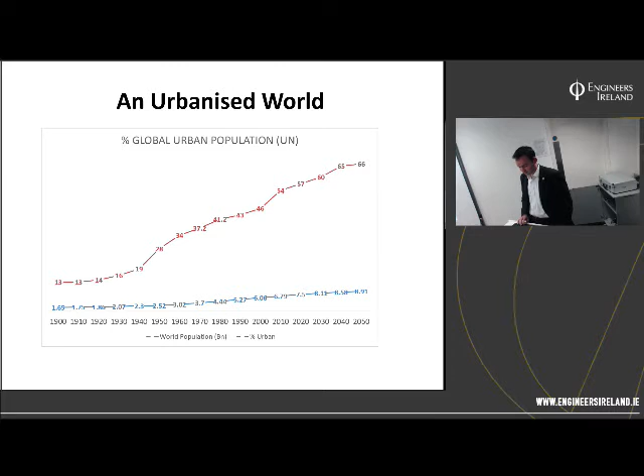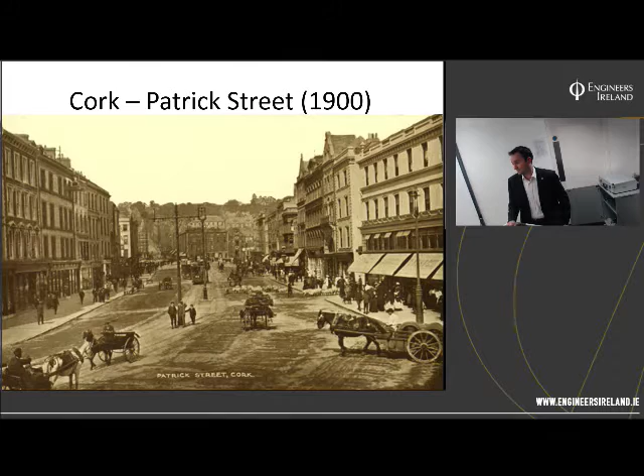Here's Patrick Street in Cork in 1900, and as you can see, it paints a very easygoing city streetscape. You've got lots of horses and carriages, you've got sheep crossing the road as well. It was a city for all sorts of livestock, and it was just very slow moving, with a complete absence of traffic lights and so on.

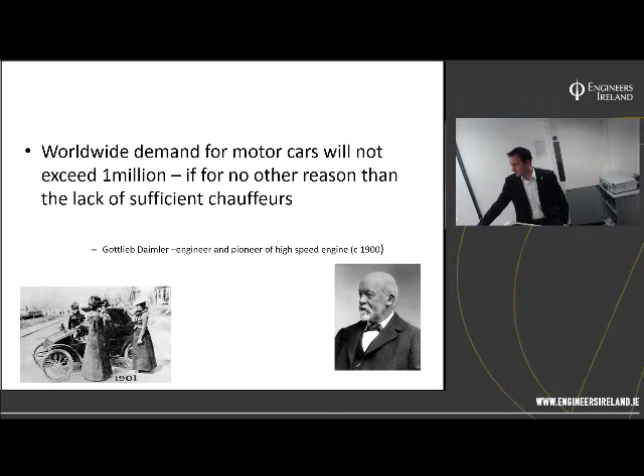Here's an early prototype of a General Motors car, I believe, in 1900. It was seen as the coming thing, but not everyone was convinced, of course. This was a statement by Gottlieb Daimler, engineer and pioneer of the high-speed petrol engine. Despite what some people said, by 1910, almost all London bus services were petrol engine rather than horse.

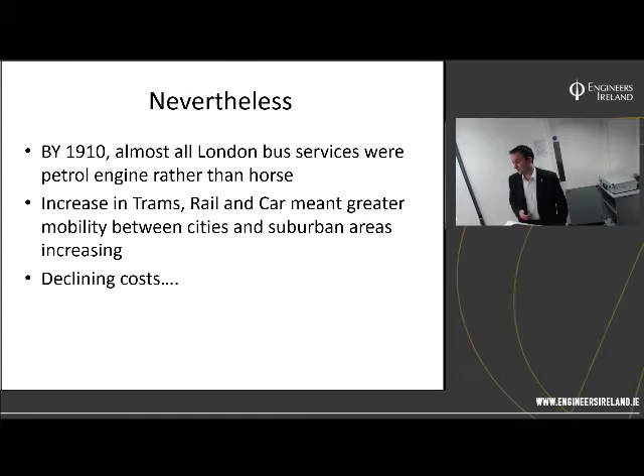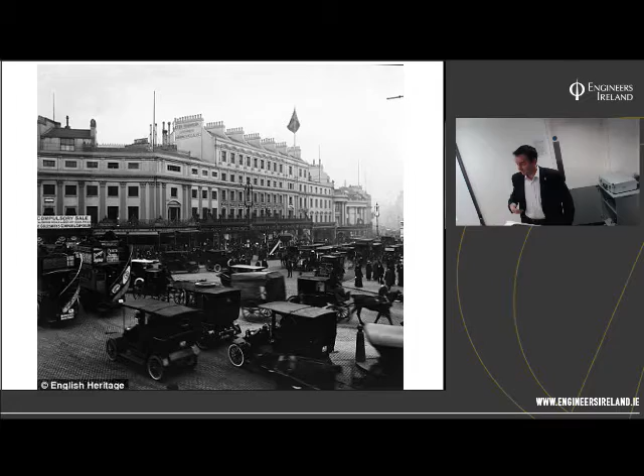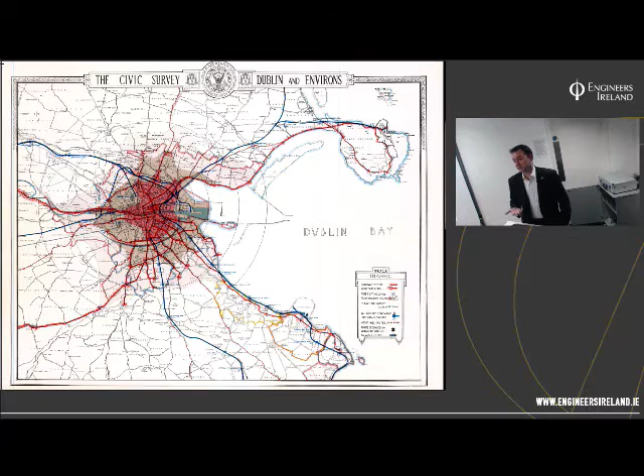Jumping across the water to Dublin, this is the extent of the tram system in 1916-17, I believe. You can see all the red lines extending out of the city. Quite ironically, this was seen as the golden age of rail in Ireland and the tram in cities. And like most golden ages, it usually signals a peak and a subsequent decline, because by the mid-1920s, the first Dublin bus was introduced.

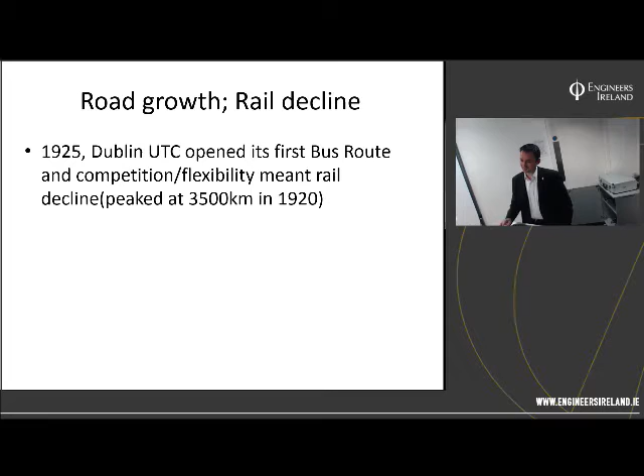Rail was peaking at 3,500 kilometres, but was going to reduce. It's quite interesting, the anecdotes at the time. You had talk of buses having greater flexibility than trams in Dublin. For example, there were stories of buses cutting in front of trams to pick up the next customers at the next stop. So it was a very highly competitive market.

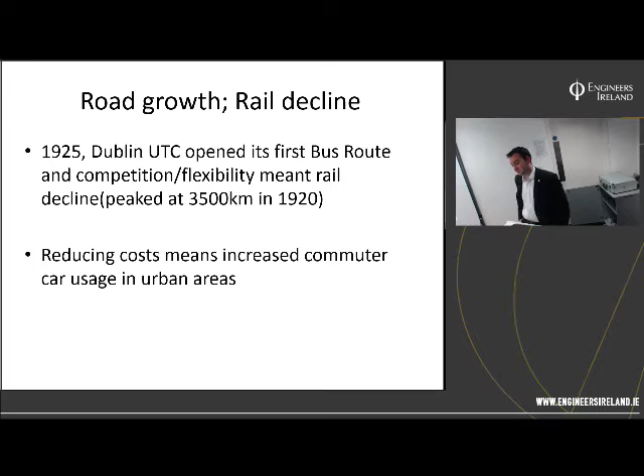And increasing car usage in urban areas. I think in Britain by the end of the 1920s, we had almost 100 registered car companies in production. So the times had very much changed. And then this is the typical London driving licences as well - you've gone from about 100,000 in 1920, up to 250,000 by 1930, and then just before the war, we were approaching 350,000.

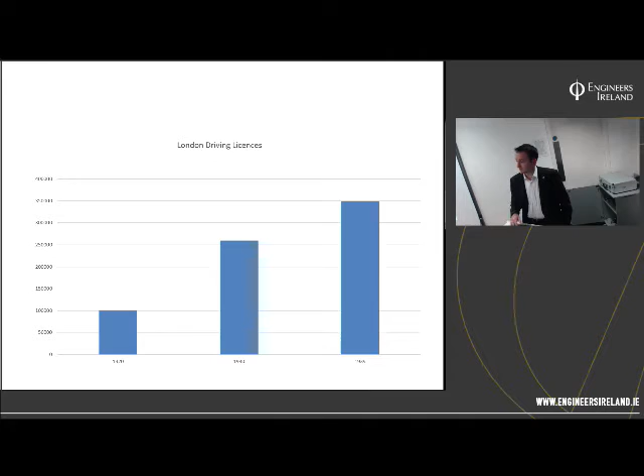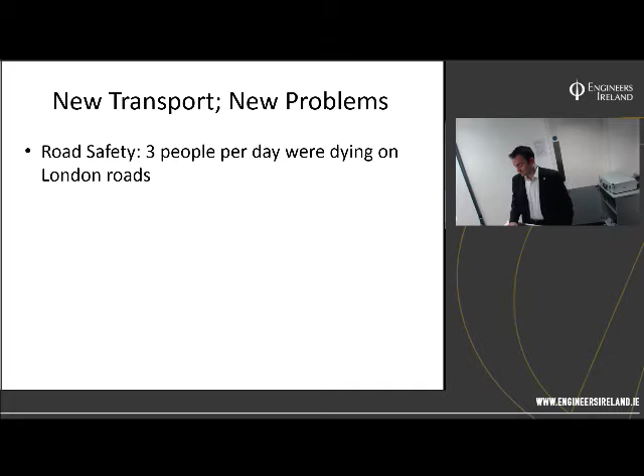So again, increased car usage in central London, and road safety was what came out of this, where at some stage we had about 3 people per day getting killed on London roads. Again, you had capacity stories - I think we had 51,000 vehicles, 3,300 horse-drawn carriages at Hyde Park Corner in 1921.

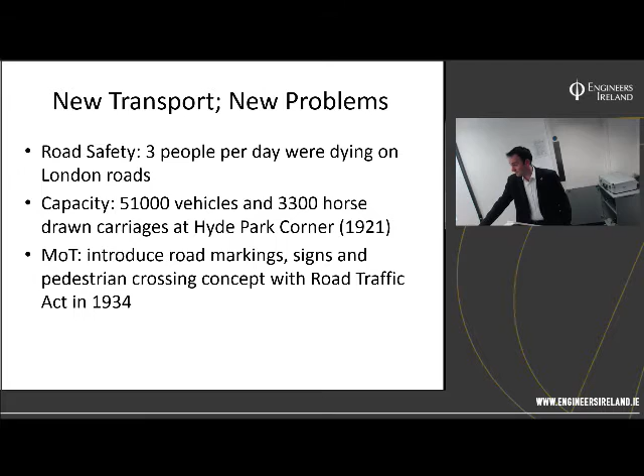And of course, legislation took time to catch up with this, so we had the Ministry of Transport having to introduce road marking signs, a new concept called pedestrian crossing, which was in the Road Traffic Act 1934. And of course, we had the first traffic signals.

So the first traffic signal was introduced in 1926 at Piccadilly Circus. The first one they had a go at was in 1868 - it was a gas-powered traffic signal. It exploded after one month, killing the person operating it. So they had to wait another 40, 60 years before electricity was more reliable.

They had the first signal installed in Dublin in 1937. And at this stage, we now have 4,000 to 6,000 traffic signal junctions in London, depending on how you count them. So it was the scale of things.

And post-war, we kind of entered the planning stage, where this is the famous Ringway scheme in London, where the plan was to build 3 or 4 concentric motorways around central London, just where the talk was purely about capacity, trying to keep things moving as much as possible.

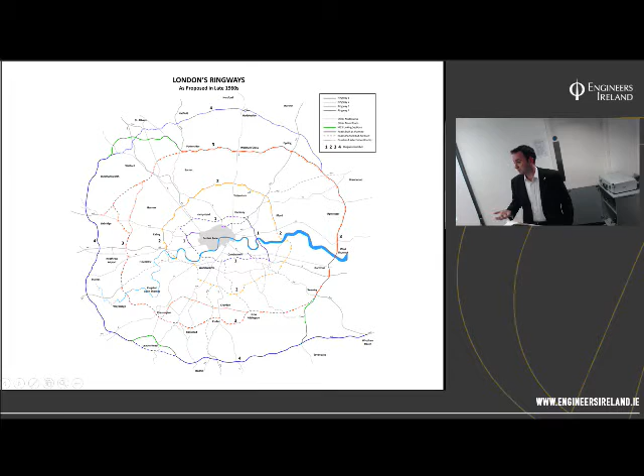So you have the North Circular Road in the north, which is probably the only remains of that. But you also had the Blackwall Tunnel, the second bore, opening in 1967. And you can see the remnants of the M25.

On the other side in Cork, you have this grade separation running through the heart of the city. Now, to anyone who doesn't know what Cork looks like, I think the rail station is just to the right of the picture, but it essentially demolished a major city block in the city centre to have multiple slip lanes.

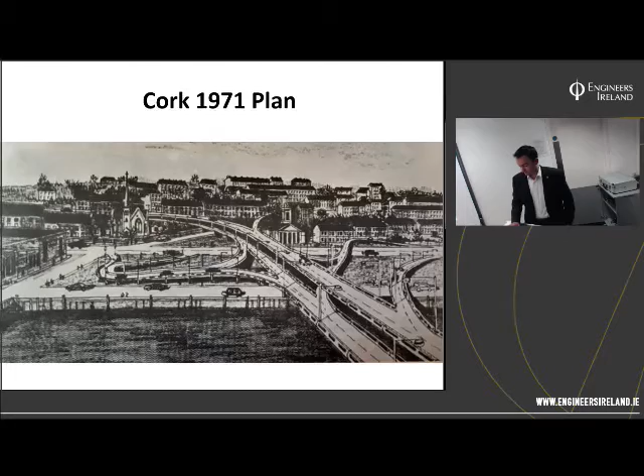And it's worth reading about a guy called Robert Moses in New York, because that was a man who absolutely loved capacity, and at the time he was advocating lots of slip lanes and this kind of grade separation in New York. And just for comparison, this is what this road looks like now - it's just a simple 3-lane carriageway, non-grade separation.

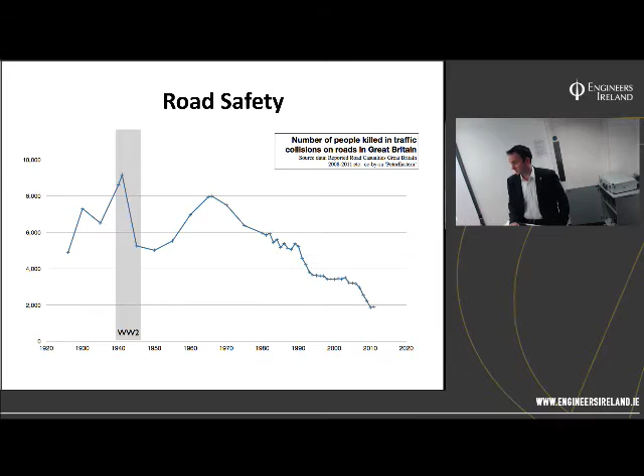Sometimes the traffic growth at the time in the early 70s was assumed to continuously be going up, and it wasn't quite the case. By the early 1970s, we had probably the peak in road safety - we had about 8,000 people getting killed on the roads in the UK in the late 60s. In Ireland, this is a typical trend as well, up to 1972. So something had to be done in terms of road safety.

So we had seat belts becoming more mandatory, particularly in the early 80s.

We had advertising campaigns between 1970 and 1986, about 7 or 8 individual national advertising campaigns. Pedestrian crossings were introduced, as well as speed limits. Around this time, 70-mile-an-hour limits on motorways and 20-30-mile-an-hour schemes were planned in cities in the UK and Ireland. Drink driving was absolutely rife as well.

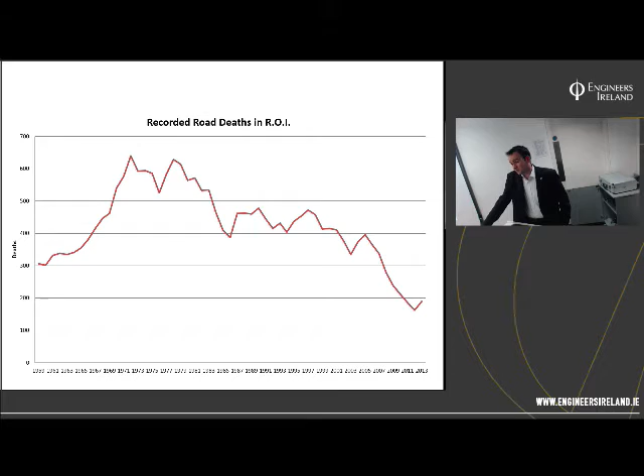Consequently, we had the concept of engineering, enforcement and education introduced - essentially the police or the Gardaí in Ireland working with road safety engineers, and the education of the general population on good road safety practices. From 1970 onwards, this resulted in a continuous decline in road deaths. Now Ireland is ranked 6th in the road safety index in the EU, and the UK is usually 1st or 2nd. It's something we've done well in terms of city and rural road safety schemes, and something we should be quite proud of.

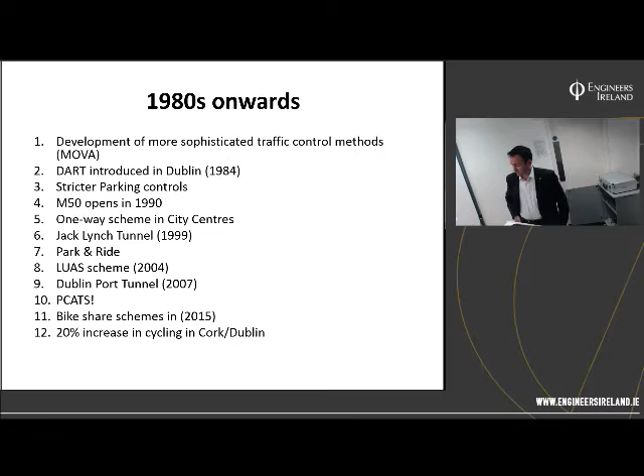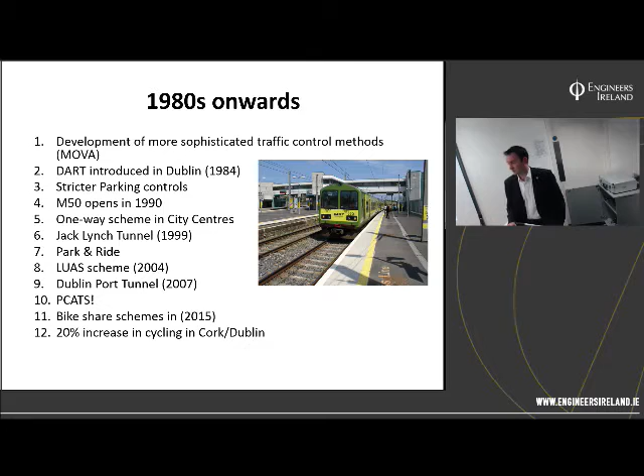Then we get into the 1980s, where we developed more sophisticated traffic signals such as MOVA. We had the DART introduced in Dublin. It was around the 80s when we started trying to move away from cars and focus more on modal shift, with stricter parking controls. We had the M50 ring road around Dublin, so if you wanted to travel from, say, Ballymun in the north down to Dún Laoghaire in the south, you could just use the M50 rather than go through the city centre.

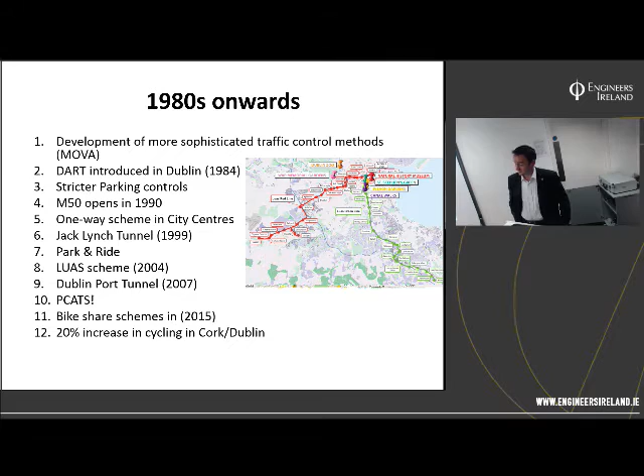Correspondingly in Cork, we had the Jack Lynch Tunnel on the east side of the city, so if you want to go to Dublin, you don't have to go through the city centre - creating a nicer urban environment. Then we have the Luas light rail scheme, before all the strikes, which has been quite transformative in shifting modal share from cars to people using light rail.

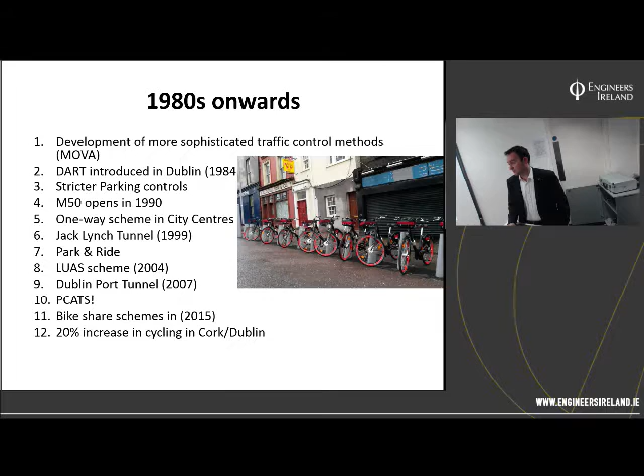And then in Cork, Galway and Limerick, we've had bike share schemes introduced, and other things like PCaTS, or pedestrian countdowns at traffic signals, have been quite a success. In the last 10 years, we've had about a 20% increase in cycling in Cork and Dublin. So it's quite a far cry from what you saw on Patrick Street in 1900.

And then we've had Crossrail, scheduled to come in 2018, which allows you to get across London in about 20 minutes - which would be excellent. So that concludes my section.

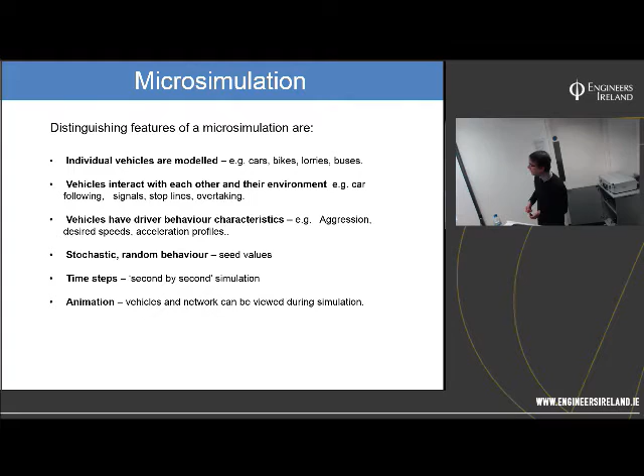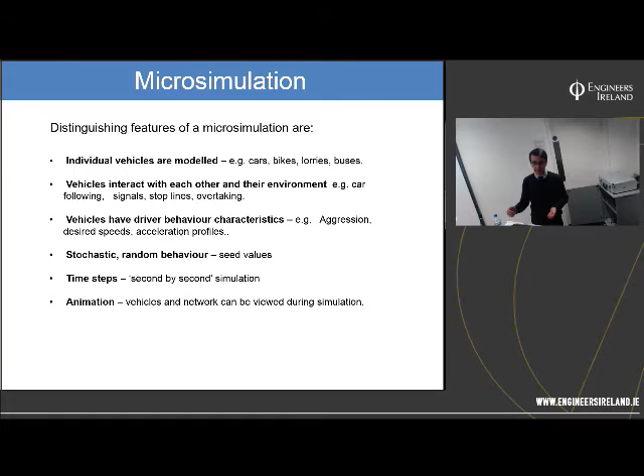And finally, we've got an animation. We can present these models in 3 dimensions, nice graphics, video presentation - great for stakeholder engagement, getting the message across, talking to non-engineers, engaging with the public, letting them see what we're proposing. We can do all this in 3D animated videos, something we can't do in traditional modelling.

All of these things distinguish microsimulation from conventional traffic modelling.

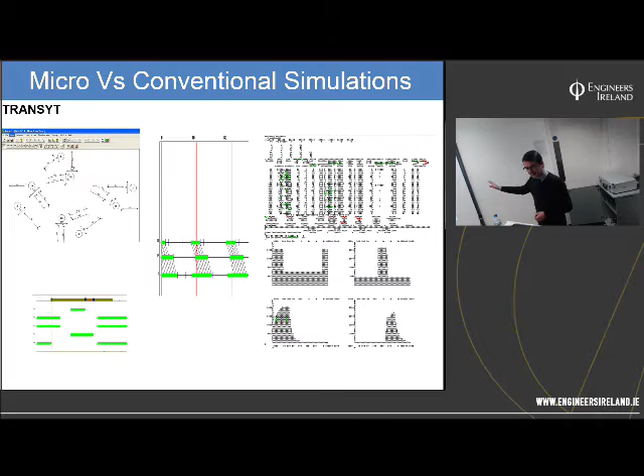On the right is how we would represent a traffic network in this type of abstract model, and those are the kind of outputs we have to deal with and look at. It's not pretty. We find it very difficult to communicate to the general public, to each other, with designers who just want to quickly have a look - is something working? This is not a great way of going about it. It's still an essential tool though, we still use it, it has its purpose.

Oppose that to a microsimulation model where everything's visual and our data is graphically displayed in a manner that's easily understood. You can see green times and red times of signals. Maybe not everybody will get that, but your average traffic engineer, whether he's a designer or a modeler, will understand this. We've got the 3D aspect, and we've got an abundance of different data that we can output from the model. We can analyze these scenarios in many ways. We really can.

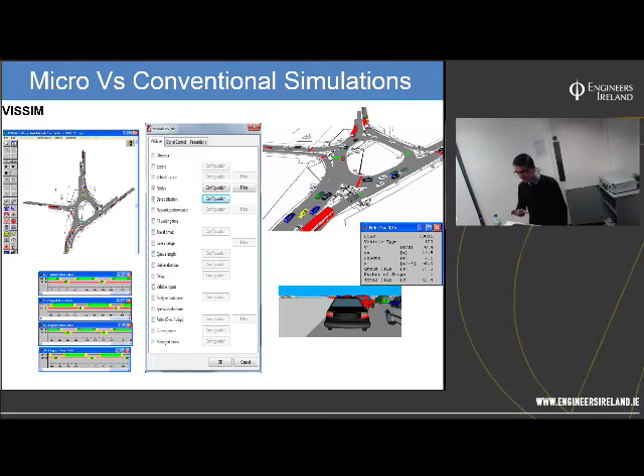Why? Okay, so we've got this capability - when and why would we use it?

London's busy. When networks start to get oversaturated, when they start to exceed their capacity, traditional traffic modelling breaks down. The numbers start to just get very big - they stop making any sense.

Where with microsimulation modelling, we can oversaturate a network to its ultimate limit, right up until the point where it would lock up and seize. We can analyse all the way through up until that point, and we can continue to work with the model and try and find ways to solve the problem, retain equilibrium, keep people moving.

We need to use microsimulation modelling when we need to apportion capacity by mode - for example, the bus network, pedestrians, cycle priority schemes - because we can model each individual vehicle at quite good detail. Microsimulation modelling is the thing to use for this type of work.

We need to test complex traffic control logic. Our network is full of complexity to keep it moving, to keep it running smoothly. We need microsimulation tools to test those scenarios, to test those ideas out. They won't work in traditional traffic models.

Advanced traffic management schemes such as selective vehicle detection, bus priority, variable message signing, congestion management techniques - all of this is done in microsimulation.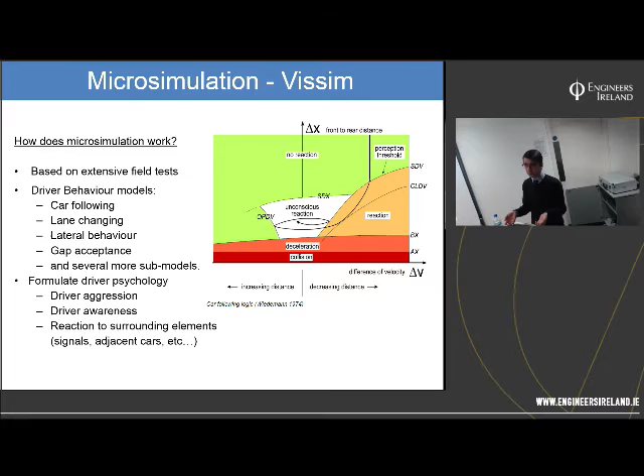Microsimulation models, because they're so visual, you spend most of your time watching a network, calibrating it, adjusting parameters, and observing that you get the result that you're looking for. You don't need to refer back to deep mathematical equations again - it's not necessary.

Vehicles - I've said we can do all vehicles in a model, and I really mean we can invent vehicles if you wanted us to. We group them together in a number of ways, depending on whether we're grouping them on size, their performance, their purpose, or their applicability to highway regulations.

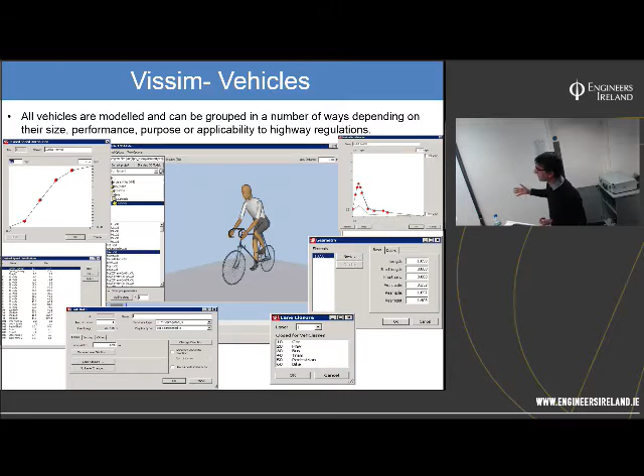All of that data displayed on that screen is, loosely speaking, a small segment of the data that I would apply to a cyclist in the model. We have to do this for all vehicle types in the network. We might even split our vehicle types up into different classes - aggressive cars, non-aggressive cars, commuter cyclists, leisure cyclists - and we model all those individuals by adjusting parameters in the model.

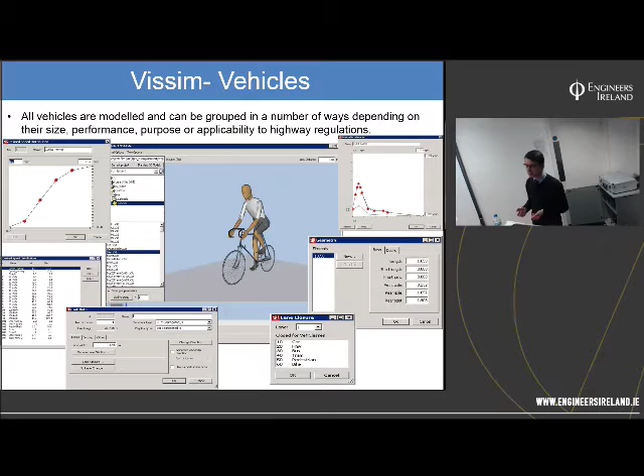Outputs, numerous. We can look at everything: volumes, speeds, mean speed, detailed travel times and delays, turning counts, queue length statistics. If you can measure it on street, you can probably measure it in a Vissim model or a microsimulation model. It's trying to replicate it in the same manner. You can cover any amount of simulated time, and it can be specific down to an individual vehicle, if you like. You can track individual vehicles from the network and get full journey time, delay, statistics, everything.

We also get programmatic access to microsimulation models. So those of us that can write VBA software code, we can interact with the model and bring out data in a manner that we need, even if it's not native to the model itself. And naturally, 3D visualizations of the network for stakeholder engagement.

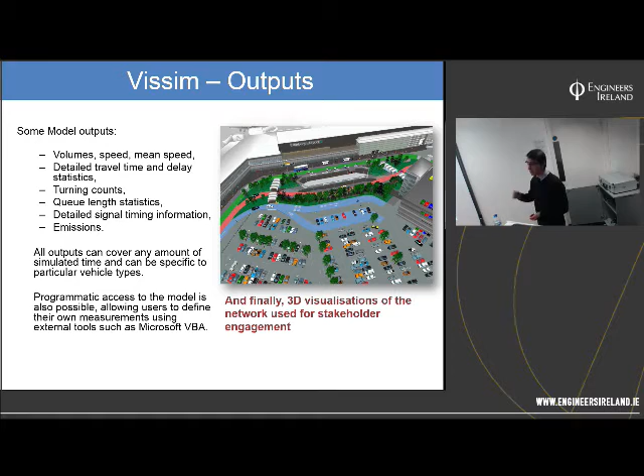Okay. They are still limited. I've mentioned that at the beginning that there were multiple layers of modeling and some of the more traditional tools. Microsimulation models don't generally optimize signal timings in the model. We have to find an optimized signal timing plan, put that into the microsimulation model and test it. We can do some fine tuning at that stage, a bit of tweaking on the timings, but actually getting an optimized timing plan is difficult and hard work.

So we use TRANSYT and LinSig models to feed the Vissim models or any of the microsimulation models. They don't tell us how a scheme will impact on travel demand. They assume the origin destination matrix and traffic flows loaded onto the existing network will not change.

Now this is where we go back to the beginning, and I talked about strategic modelling. Strategic models are suited for exactly that. They look at the demand for travel. They figure out how people are going to get from A to B. If I've got a Vissim model in which our intervention is significant enough to change traffic flows and demand, I would have to go back to a strategic model, do some analysis there, and apply new flows and routes in the Vissim model. So although it's a limitation, it's not something we can't handle. We can still deal with it. Just have to do a little bit more work.

Other things, so we still on conventional models, we still start with designs. We still use things like LinSig to maybe come up with a signal control design. So we wouldn't do that in a Vissim model. Again, the signal operation is designed outside. We bring that into Vissim, where we can fine tune naturally, but it would be hard work to design in Vissim. We take all of that data, we put it into Vissim, and we get scheme implementation.

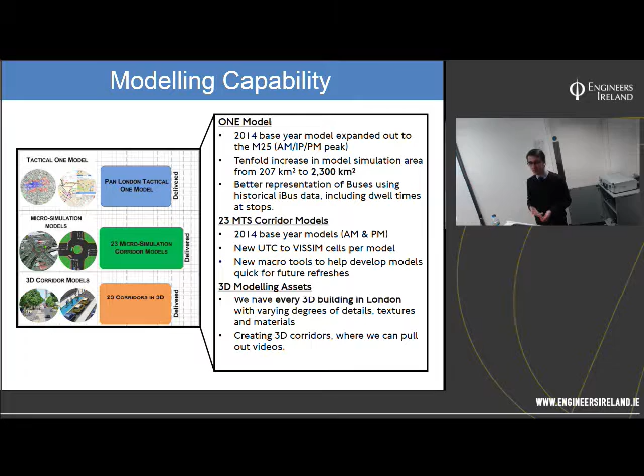The first aspect of our modelling capability programme was to develop London in 3D. So now we can present the microsimulation work in a 3D environment to our stakeholders. It gets schemes built, it saves time. A lot of time is lost in scheme development through trying to communicate engineering to people. Very quickly, we've built all of the corridor models now for the 23 TLRN corridors, I should say.

Collectively, we built this schematic, copying the tube map to show all of the corridors in London, and we've built all of that in microsimulation modelling.

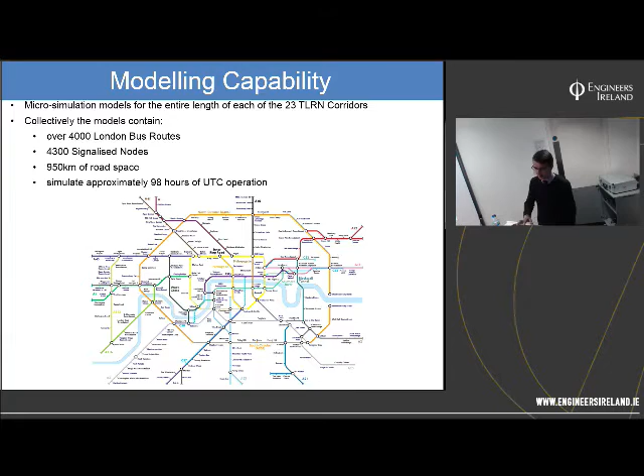Just a few stats to give you a sense of scale. Collectively, because each corridor is an individual model, we have 4,000 London bus routes calibrated and validated against observed data, 4,300 signalised junctions, over 950 kilometres of road space, and we're simulating around 98 hours of urban traffic control operation. We've had to develop a process for this over two years.

We've got a methodology just for building large-scale microsimulation models. The tools are aimed at keeping things consistent, removing errors, and removing the manual input of data that doesn't need a professional modeler to do. We wanted to focus our time on calibrating these models once put together, to get them representative of the network. This whole process was developed to allow us to focus on that aspect. The methodology is in constant review, we're always updating it.

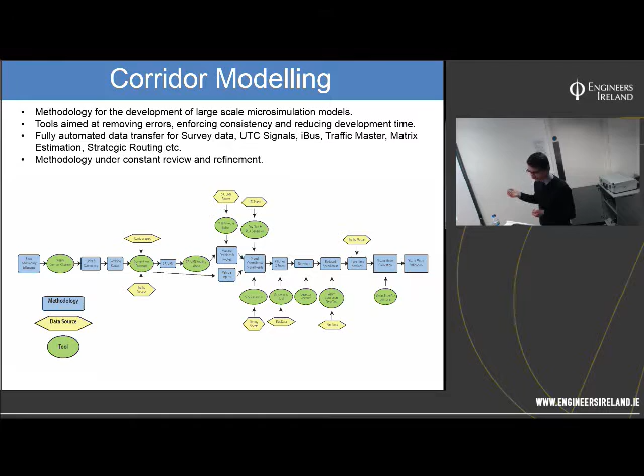What do we do with the corridor models? One of the principal pieces of work we do is journey time reliability analysis. It's a KPI for us. We are tasked by the mayor to maintain and improve journey time reliability along our key TLRN routes. We need detailed data output from a model that describes the journey of every individual vehicle we modelled. Microsimulation is the only type of modelling we can do this for.

We've also got an urban traffic control system running across London. We've duplicated it onto a PC-based version which we can connect to our VISSIM models. So our VISSIM corridor models are actually talking to the exact same urban traffic control system that our real junctions and signals outside are talking to. It's a replica, it's offline, so don't worry, we're never going to get them mixed up. But it shows we've got SCOOT, we've got MOVA, we've got VA, we've got SAS, iBus priority, we've got it all, demand dependency. Everything that's out on our network is now in our VISSIM models. This is quite special. I don't think there's anywhere else that's done this.

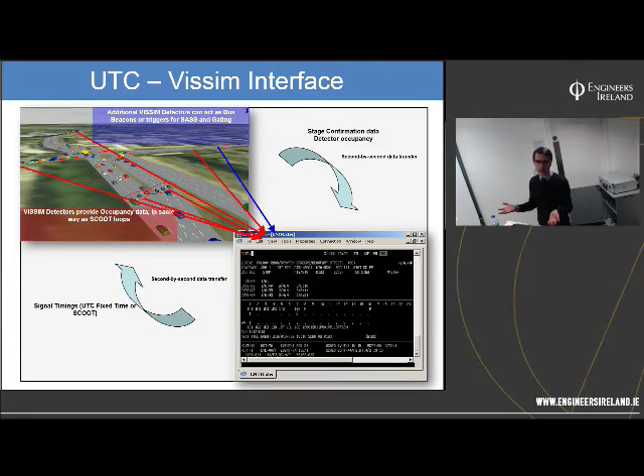Really done. We've got all this data, all these models. What do we do with them? We don't just leave them on a file somewhere. We've recently developed a modeling library which collects a lot of metadata. We relate to search, we can apply security, archiving. It's accessible through web browsers and file explorers. My team manages this side of the modeling library to get everything recorded.

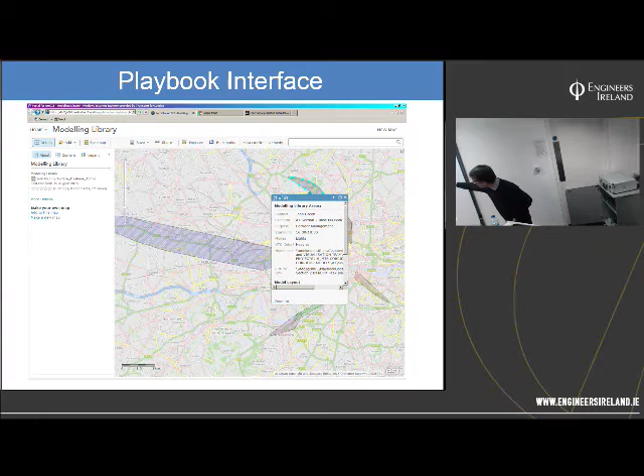There is then another tool which we call Playbook, which can talk to our modelling library and give users across London, the boroughs, TfL itself, a view of our modelling library stock, what models we have, why they exist, and what we should be doing with them.

And that's it from me. If there's any questions, I'd like to answer them. Yes? Two questions. First is about a technical or engineering question.

We can attempt to replicate all behaviours on the network, but I think that would be a little beyond us. We can attempt to replicate everything that we observe on the network, but you have to draw the line somewhere. You have to ask what's important that we're seeing, and if it is, we'll endeavour to implement it in the model. But first we need to get some data on it. We need data before we can build the model. So how do we describe that phenomena in data? How do I put that into the model? If I can do that, then yes, we'll do it.

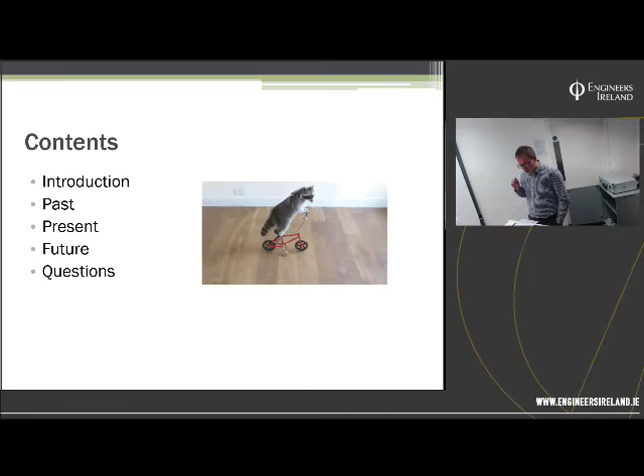You probably get a flavour of what I'm going to start saying now. I'm going to do a little bit of an introduction about myself, talk about some of the stuff I've worked on in the past, some of the present stuff we're working on at TFL, a little bit about the future and innovative ideas, perhaps, and then I'll pause at the end for some questions.

Hugh said introduce a little bit of humour, so here's the humour. The bottom one's particularly good.

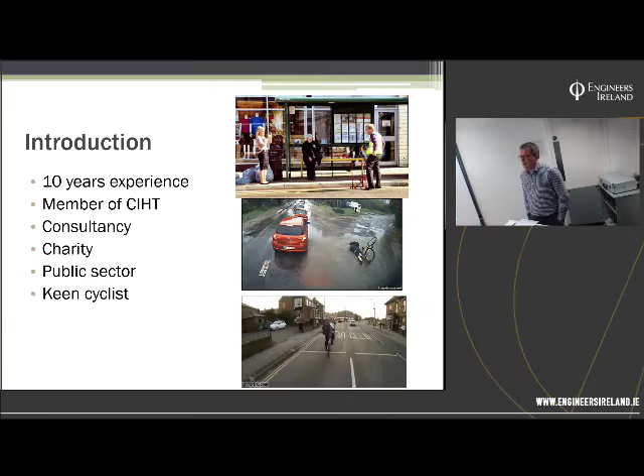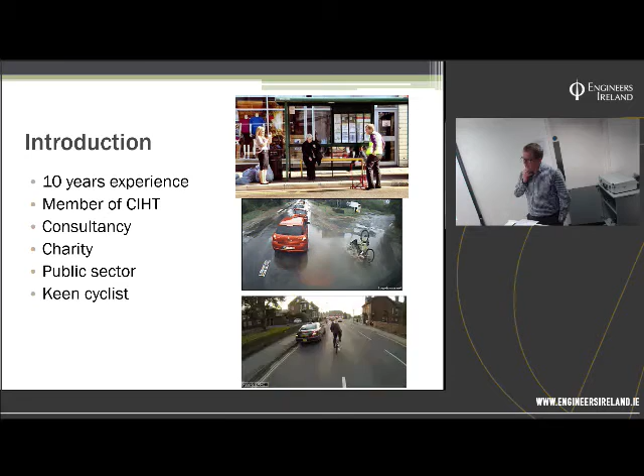Anyway, I've got 10 years of experience as a traffic engineer. I'm a member of the CIHT, and I've worked across multiple organisations - in consultancy, with Sustrans, a cycling and walking charity, and now at Transport for London. And I'm a bit of a keen cyclist myself, so I have a vested interest in the stuff I do. The picture of me at the top is me doing some engineering - I think that was measuring the height of curbs for bus stops.

So I'll start talking about some stuff that I've done in the past. My career's currently overlapped with the development of cycle superhighways and the move towards the Mayor's vision for cycling in London and where we go in the future. So I feel like it's kind of defined what I've done so far. The first thing I really worked on was Cycle Superhighway Route 8 - it's kind of the forgotten superhighway, if we can call it that. It was the first generation, meaning the first one after the pilot.

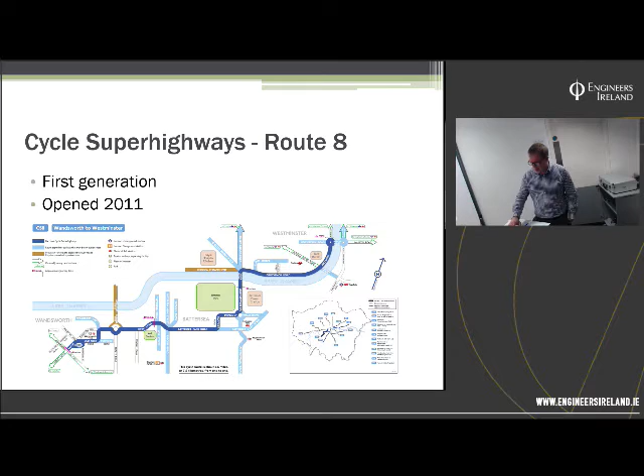So pilot routes 3 and 7 were where things were tested, and then 2 and 8 were the ones where we actually implemented some stuff. I quite like Route 8 because I worked on it, but there's good bits and bad bits of it. Essentially, it's 7.5 kilometres of blue paint with some novelty features in there. It was a really good stab at trying to parcel up parts of London and get a cycle route along a potential commuter route, meant to go to Parliament Square, but it stopped short at Lambeth Bridge. It served its purpose at the time, and was kind of groundbreaking for then.

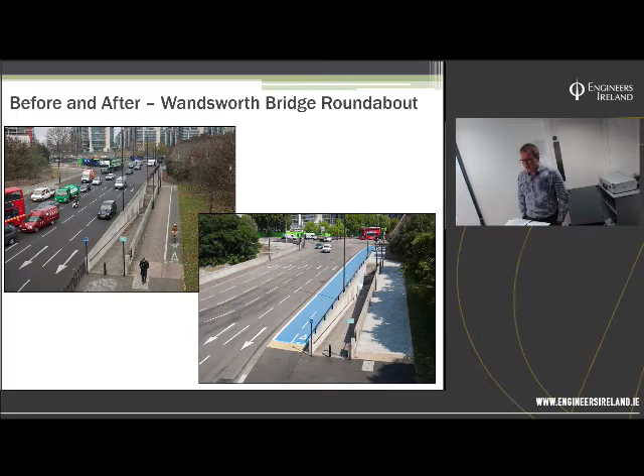There's some good parts of Route 8, and one of them is Wandsworth Bridge roundabout. This was 6 circulatory lanes. If anyone's familiar with that area, it's a very busy, horrible roundabout, and the routing went basically through it - the line on the map, the alignment was through the roundabout. As you can see, there's some substandard segregated cycle facilities there, a subway, and very intimidating traffic conditions on the carriageway. Back in 2011, we took a lane out from a quite busy road on the TLRN and put it to a 2-way cycle track. So the seeds were there for the stuff we're doing outside, on the embankment, and on CS2 upgrades. That's only about 30 metres long, but there was some segregated 2-way cycle track back in 2011 - that's five years ago. And it's very blue as well.

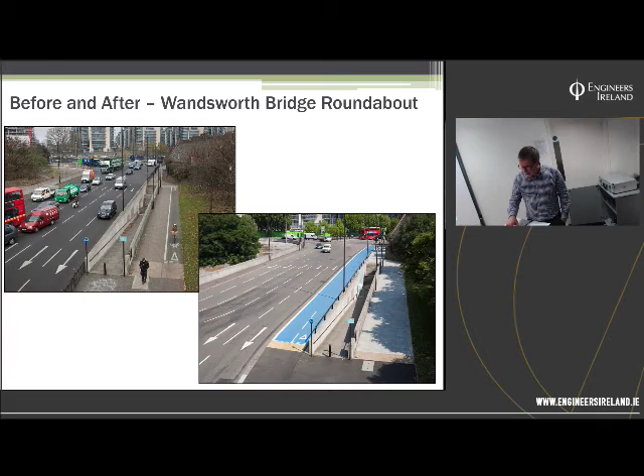Now, Wandsworth Bridge Roundabout was a particularly difficult junction, and if you look at the after picture now, it doesn't really look that good. It doesn't have a hold-the-left-turn, doesn't have all these new features we're doing on CS2 upgrade, for example. But at the time, actually getting the blue paint on the ground and putting lanes across junctions, highlighting the presence of cyclists, was quite a big deal.

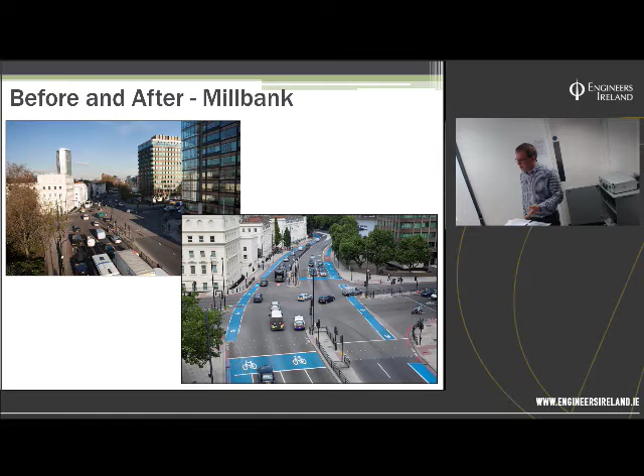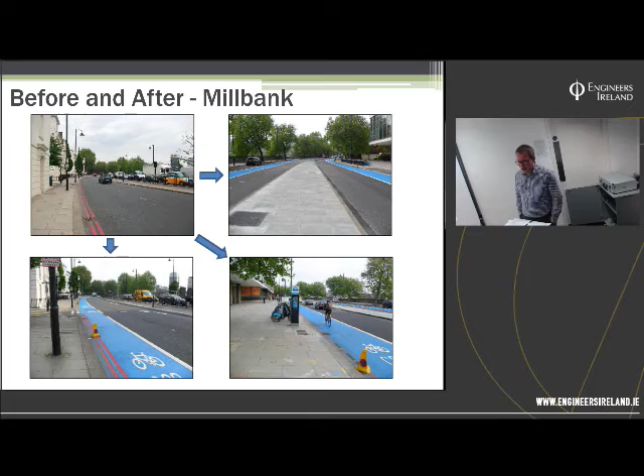The 2 elements north of the river - so we come across at Chelsea Bridge, along Grosvenor Road and Millbank towards Lambeth Bridge - there are vast tracts of lanes, not segregated, mandatory cycle lanes that are quite wide with flow, and very vivid blue when they were first put in. That's pretty good in my book. I wouldn't want to segregate that, then or now. It's quite well respected as a cycle facility, and I do know Route 8 is being upgraded in the near future, I believe. So that might change, but in my opinion, we did some good stuff back then.

A real problem I found when working on Route 8 was how we dealt with curbside activity. It's much to do with the alignment of Route 8 in that it goes through a couple of high streets - along Battersea Park Road and Battersea High Street. So there was always going to be an overlap with loading, parking, curbside activities. Here we can see in this photo, thank you Google Street View, that it was simply put paint through a loading box and just hope there was nothing in there at the time.

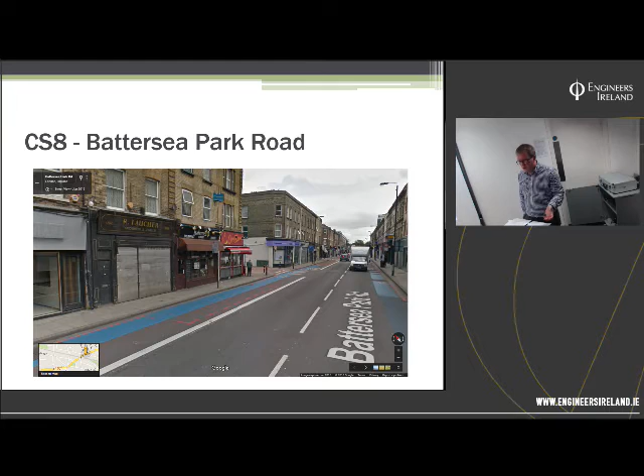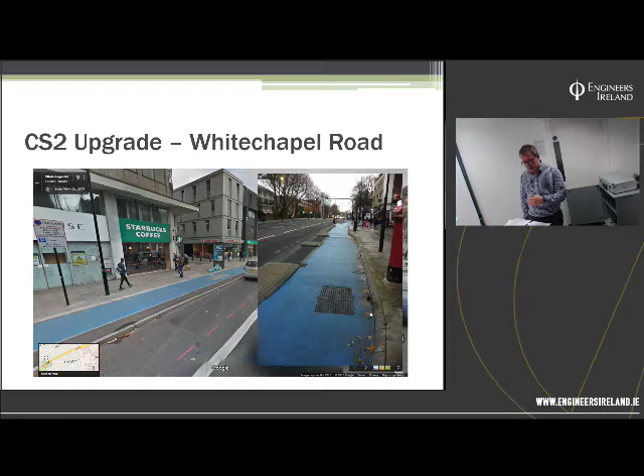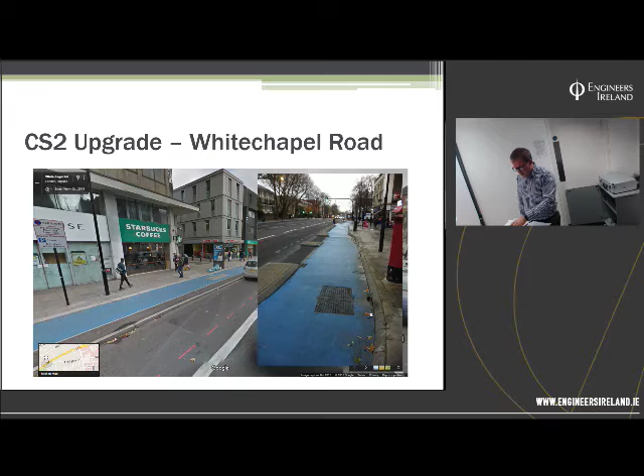If the loading box works and it's only used off peak, then during the peak times it should be free. But we've had a step change now - granted, Whitechapel Road is a different environment, it's a bit wider, we've got more space there, but it's a similar scenario where there's a bus lane, a loading bay, and a cycle route. What's happened now is that we're segregating, and thinking about how loading activities will happen across a cycle track. Here you can see we've got gaps in the segregation, so you can access the loading box quite easily, and then a drop curb up onto the footway, all the while ensuring an undisrupted movement for cyclists. It's about taking them out of the danger zone, I suppose.

So that was a bit of history, that was a bit in the past, around the end of the noughties, and then a bit later than the turn of the decade, we had the Mayor's Vision for Cycling in London, which really upped the game. An interesting document that has come out is called Human Streets, a GLA document talking about the impact of the Mayor's Vision for Cycling in London. So I think Boris does have some cause for celebration on that.

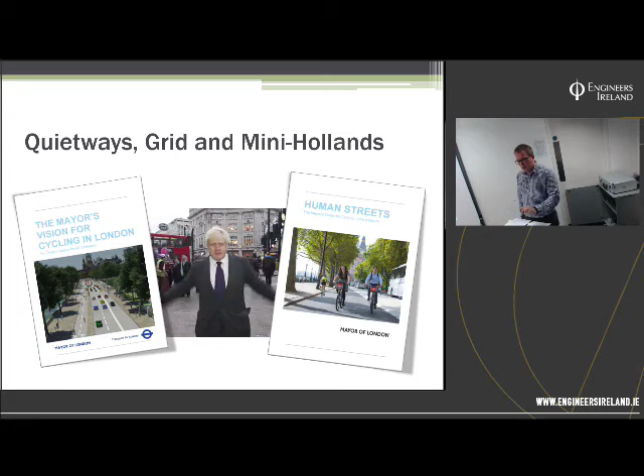That's quite a useful document, Human Streets, and that'll give you a potted history of perhaps why Quietways hasn't worked quite as well as the cycle superhighways, for example.

So the plan in the Mayor's Vision for Cycling was to improve overall connectivity throughout Greater London by including new cycle superhighways, establishing a Quietways network, and then in the centre, creating a dense central London grid. To enhance some of the outer London boroughs, the plan was to include mini Hollands in this overall strategy. Those mini Holland boroughs are Kingston, Waltham Forest and Enfield, and in my team we've been working on the Enfield project.

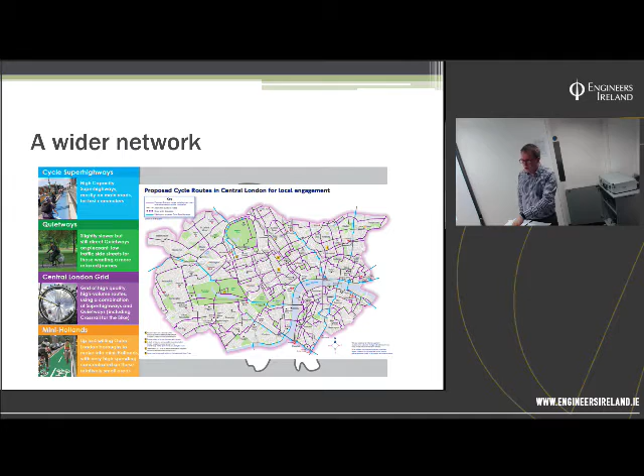But I suppose the real challenge for me and my team was that with the step change came new cycle design standards and also new specific design outcomes. So the goalposts have moved a little bit and the sights were set a little bit higher.

So with the Quietways and grid, for example, we've had to try and adhere to this set of guidance shown on screen as much as possible. And if we have a departure from that, then we have to justify it. This set of criteria plays on the 5 or 6 concepts that underlie the LCDS.

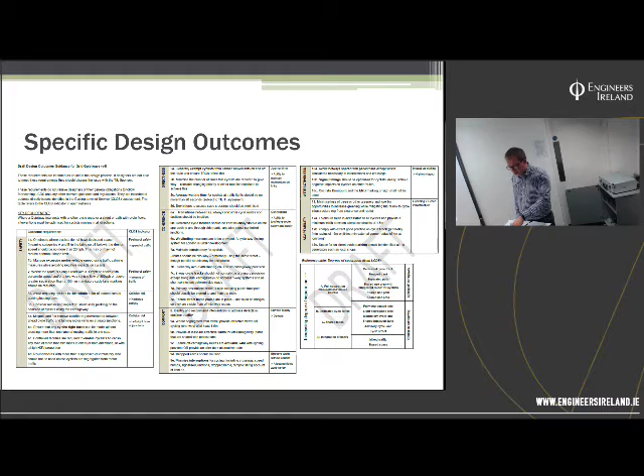To give you a flavour, there are trigger points on vehicles per hour. So over 800 vehicles per hour in a two-way flow, there should be a greater degree of separation for cyclists. So, for a change, it gave us a quantified set of criteria to work to and then justify against. It's actually helped to shape certain schemes and then try to argue the point when it comes to politicians.

I'm going to run through a few schemes that we've been working on the grid and Quietways. Apologies, all the images are consultation drawings, so they're in the public domain — there will be no design drawings shown, but you'll get the idea, and you can talk to me afterwards if you want more detail.

So Goswell Triangle on Quietway 1 up in Angel — I'm led to believe this is the busiest cycle crossing in London, with 1,300 cyclists heading in one direction in the AM peak, and about 1,000 in the PM peak coming back. So it's very tidal, but incredibly busy.

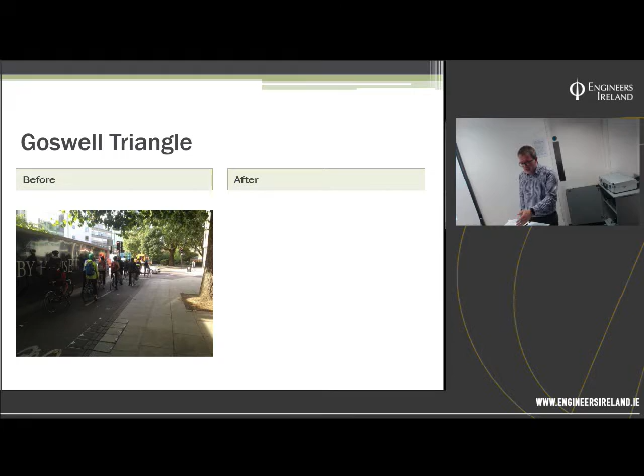Before, granted there was a housing development there and a large hoarding, but it was quite cramped. If you check out where the curb line goes through the stats covers, that was a really narrow, probably about 2.5 metre wide facility, meant to be two-way, and it couldn't even take the numbers that were there that day.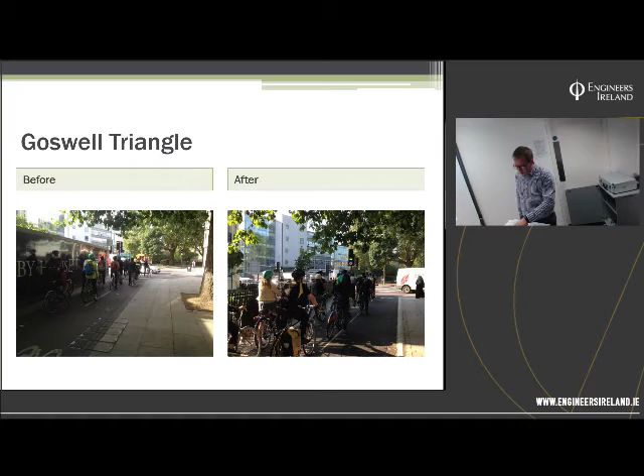Within Goswell as well, we've put in low-level signals. So if you imagine in the before picture, when you got to the stop line, you'd be looking up at the secondary signal to try and make you aware when the signals are going, and if you're at the very front looking up, it's not very pleasant. So this little thing, putting low-level signals in at your eye line, is quite simple to do, albeit a little bit expensive.

On the other side of the junction, or the other side of the triangle, there were no cyclists at all before, and afterwards there were loads. It was very busy, with 1,300 cyclists going through, but you can see the space is really constrained with a curved island. We've got a hoop on the island, and road markings not leading anyone anywhere.

So what we've done is tidied it up — it's a simple thing about how cyclists use the space. We've taken the island down, made it flush, taken the bollard off and opened that space up so more people can use it, but there's still an element of the contraflow existing.

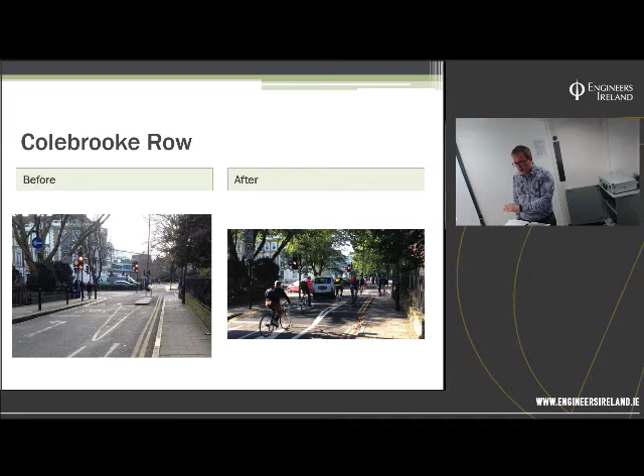I've got a little time-lapse video, which, let's see if this works.

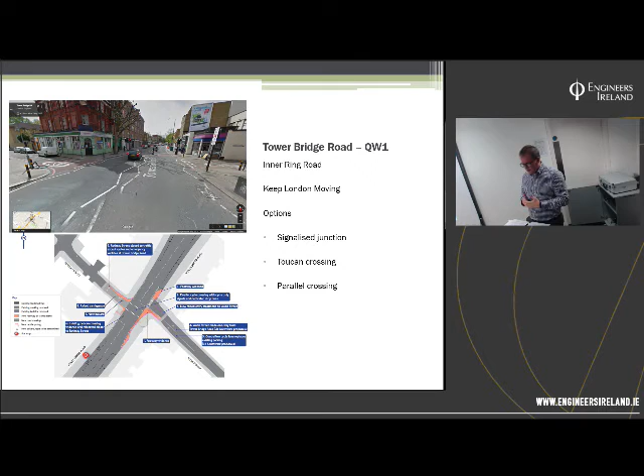If these side roads were lined up perfectly, then a parallel crossing would be easy. It's just in this location we've had to compromise, and it results in an awkward movement. But if you go on Quiet Way 1, go down there and have a look, because depending on what time of day, it's quite easy to navigate. It doesn't look quite as complicated as it's got a bit of a rap for.

A few more elements we've been using on the Quiet Ways. Quiet Ways and grid intersections are trying to be less... big isn't probably the right word, but less disruptive. It's meant to be kind of like small interventions.

So one way we can do that is to offer a bit more space and time for cyclists. The early release is aimed at cyclists in an ASL having a head start over the traffic behind them, typically 3, 4 or 5 seconds depending on the layout.

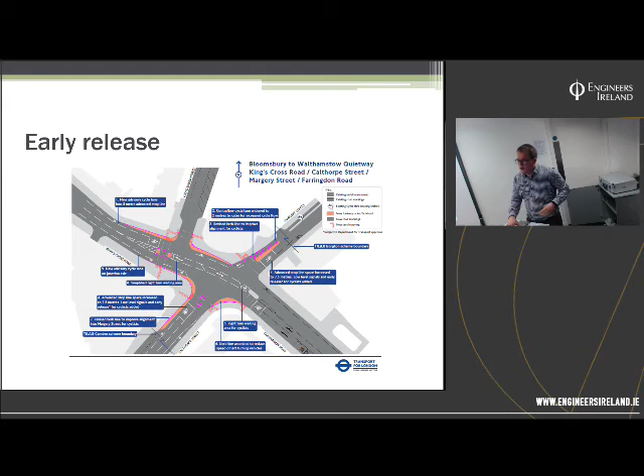The problem I've found with early release is once it's in, on a plan, it's in 24/7. So you've got to be quite confident that you want it and that there's enough capacity in the junction to take it. Fortunately, at this one we were okay, but often if you're looking for capacity issues and trying to resolve them, taking the early release off might give you that extra few seconds back. But then if you put in large ASLs for large numbers, you've still got your in-space separation, so they get a head start over traffic that way. These are the kind of compromises we've had to come up with for certain locations.

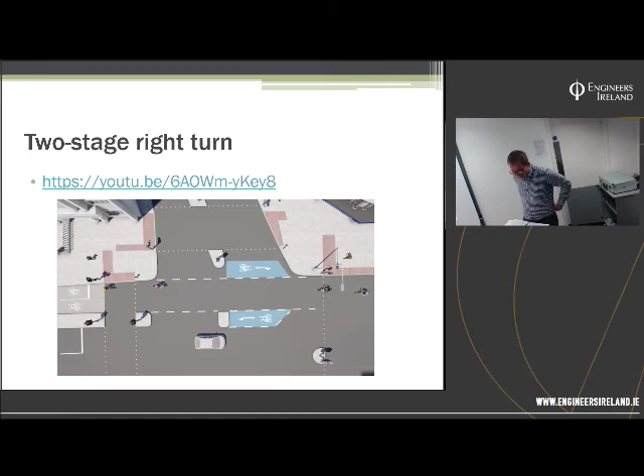The 2-stage right turn and left turn, we've put them in on a few Quiet Way junctions, or we are proposing. This is a CGI model of the junction outside, and there's a YouTube clip associated with that, but I won't show it now because it's a TfL branded thing and it's a bit dry. Essentially, it allows cyclists to make the movement onto our Quiet Ways or grid without having to do a right or left turn within the traffic, within the carriageway.

This example shows a segregated cycle track, and you could access the 2-stage right turn from that. But in many instances we're doing, you may be on the main road with traffic, but then you're provided with a little pocket to turn, do a slight left, line yourself up, look at a far-sided signal, and then proceed ahead at the next available stage.

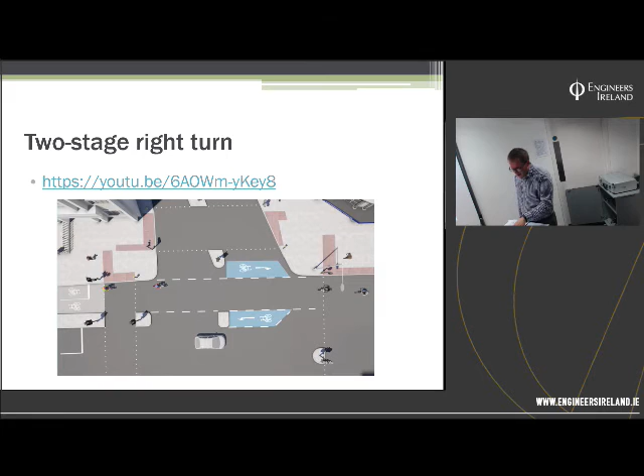A lesson I've learned is that where you're doing 2-stage right turns or lefts, it's important that the following stage is the side arm - the arm at the top - so that cyclists aren't waiting there too long or become impatient. If that's possible, you can move staging around, so you'll turn off, wait, and then go next, rather than having to wait maybe half a cycle or wait for the peds to go. That's the danger - if your next stage is pedestrians, then cyclists just go and it becomes a bit of a scramble. So if you do 2-stage right turns, try and move your staging around if you can.

We've also had the opportunity to work with boroughs on non-TLRN schemes, and that's given us a bit of liberty to push the design envelope further. This junction is Portland Street, Albany Road, near Walworth Road, just southeast of Elephant and Castle, and it's part of Quietway 7. It's not a strategic road network, it's just a borough road where there's a lot of inefficient use of green time, lots of wasted green time, quite a long cycle time, and lots of time in the junction where nothing really happens. So we were asked to come up with something that pushes the envelope on providing segregated facilities at the junction.

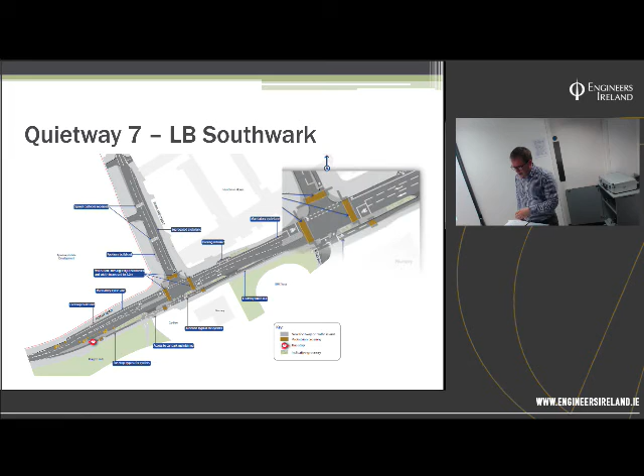So we've come up with cycle bypasses, dedicated cycle stop lines, straight across pedestrian crossings removing all the staggers, and we've been able to model this and make it work more efficiently, getting a reasonable cycle time of about 70-80 seconds. So cyclists are only waiting about a minute for their dedicated signal, which previously, on a much longer cycle time, meant they were waiting quite a long time and just going in the pedestrian stage.

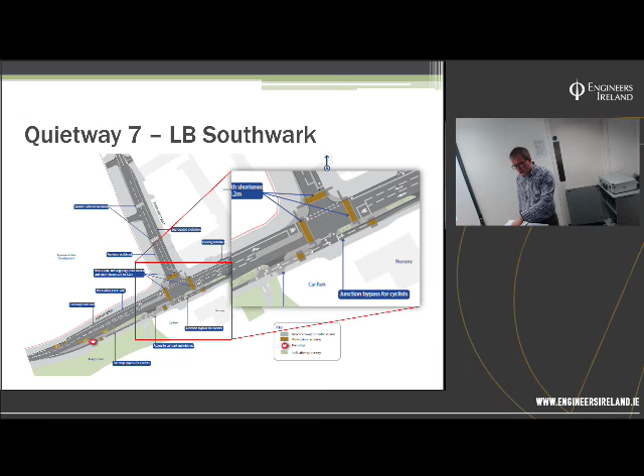A lot of what we do is trying to get in the mind of a cyclist, and ask: are they going to wait at a facility? You might have the best facility in the world, but if you've got to wait 2 minutes to use it, inevitably you're just going to cycle through it anyway. So this demonstrates a bit of a balance, and how we've managed to put that kind of stuff in by looking at LinSig modelling as well.

But some of the best stuff we've done hasn't really involved any of these new techniques - it's just about changing road layouts. So stuff like making roads one-way with a contraflow cycle lane, removing the two-way element of that side road, for example. This is in Westminster, off Edgware Road.

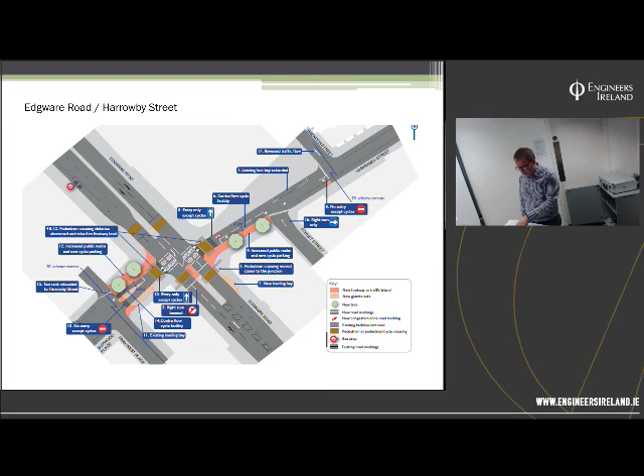There's a crossing going southwest to northeast, and we were asked to provide a decent cycle crossing, high level provision. So we've made it entry only and put a contraflow cycle lane in. Only by having the kudos of doing it on the back of the grid and quietways could we ever envisage doing something like this. Westminster probably wouldn't even dream about this unless there was a grid alignment going across it. And similarly on Midland Road, Judd Street up in Euston, next to King's Cross, St Pancras Station.

Midland Road is currently four lanes of traffic, southbound only, so the top of the picture, southbound only. And we're looking to take some of that space and make it cycle only, so you have a contraflow cycle lane and a with-flow cycle lane. And similarly on the other side of the street, potentially closing it up completely.

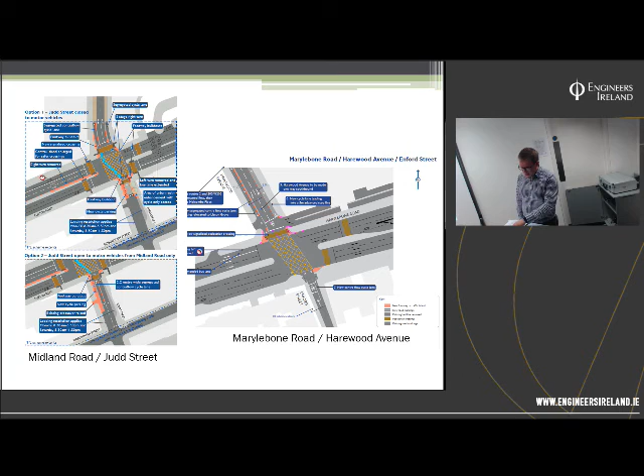So these are not revolutionary techniques, they're just using age-old engineering techniques and then just rebranding them. And then Marylebone Road, Harewood Avenue, another one on Westminster's patch, where Harewood Avenue, the top road in the picture, was actually two-way, and the proposal is to ban a left turn, close it up and replace it with a contraflow cycle lane. So pretty bold stuff, but it doesn't have to be that innovative or revolutionary.

So that leads me on to innovation, and it's quite an awkward word, I find, because we've probably got most of the powers to do stuff now, it's just doing it in a different way. The engineering techniques are maybe already there, it's just ensuring that we can put them in at the right place at the right time.

So stuff like cycle-friendly radius on a junction on a central island - you can see quite a sweeping radius there to allow cyclists to turn right from the main carriageway, whereas before you might have just put a very tight radius on that corner. We've kind of left it out a bit to enable cyclists to move a bit easier.

And then crucially, materials and making sure things look nice. Quietway 1, if you go along it, they've really gone for it. It's cycle turfing, I think the terminology was, where everything's block paved, lined in gold. Marshalls did really well out of that, I think. Looks really good. Some of it's starting to fail, but material is important.

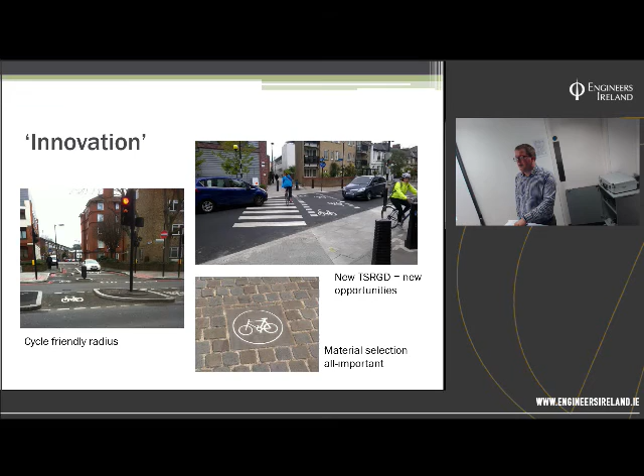So do you need block paving, or is an asphalt top table good enough? Okay, you've got streetscape to consider, but material selection is all important, and the new TSRGD gives us new opportunities in terms of what's now legal. So the parallel zebra crossing is now legal. We can take away those give way lines, and you'll be seeing a couple of these come in on TLRN in the future.